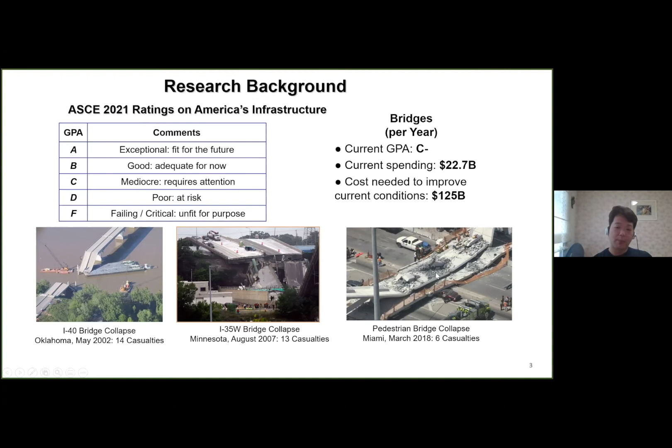According to the ASCE 2021 report, our infrastructure, especially bridges, has a GPA of C-. If we want to improve this current status, we need $125 billion, but current spending is only $22.7 billion. No matter how technology develops or improves, we still have the same issues like bridge collapse.

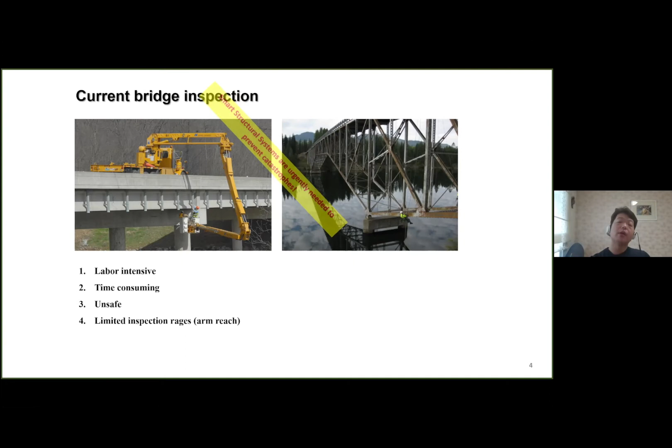FHWA requires inspection every 2 years, but it still has limitations. It's labor-intensive and time-consuming, and unsafe. Also, it has limited inspection ranges, arm reach is limited. Another issue is that if the inspector cannot find the damage at a certain inspection, that damage growth will not be detected until the next inspection cycle. That's a significant issue, which is why we urgently need smart structural systems to prevent these catastrophes.

This is the basic idea for structural health monitoring approaches. Take a brace structure - if we insert an accelerometer, based on the vibration or environmental load, we can get a response. In the same structure under the same condition, if the structure has damage, this vibration pattern changes. Generally, the time period becomes longer, or the frequency decreases. We investigate these two patterns, compare them, and then back-estimate where the structure has damage and how severe it is. That's the basic idea for the structural health monitoring approach.

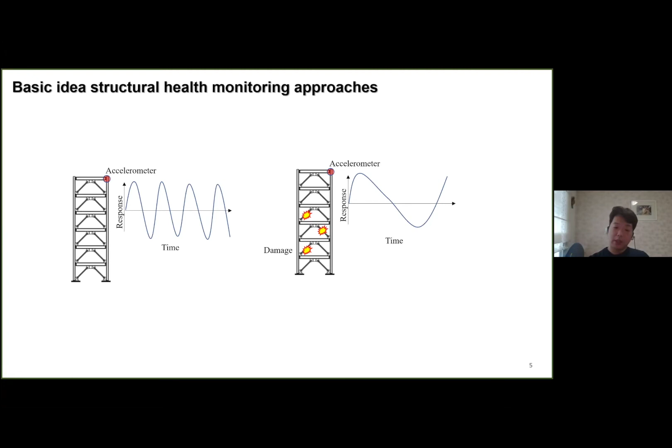This is actually the pattern, like a vibration pattern, a structural response pattern. So I will use supervised machine learning, which is a very good way to distinguish these vibration patterns.

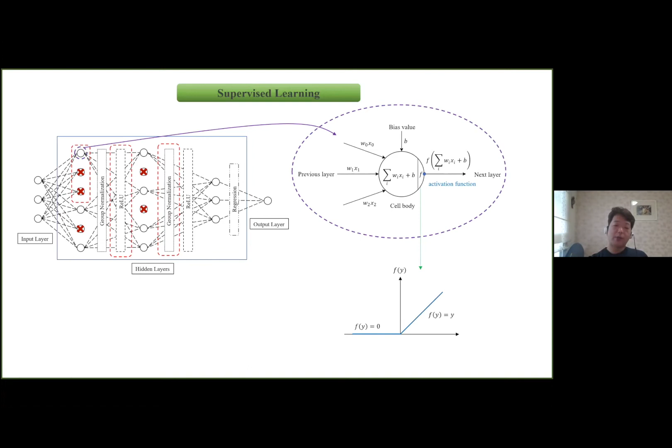But we have another issue. As you know, machine learning requires high quality data, but we cannot make that data easily. It's difficult to obtain data on damaged structures, because we cannot intentionally give damage to the structure, right? We cannot break our bridges.

So this is my idea. I built a model, like an acrylic model. The size is 300 millimeters by 300 millimeters for width and height, and the length is 3 meters. I assume that this is a real bridge. Then I will insert 6 to 8 accelerometers, and then we can measure the vibration.

Then I build another model, a numerical model. We synchronize these two using the model updating technique. Once the model updating technique is well done, if we give the excitation, like the same input data, then the structural response will be the same. Then we assume that these two are synchronized.

In this case, we can give damage, like changing the member size on the numerical model, to emulate or simulate the damage and generate the damage response. To compare if it's really working or not, we compare it with the acrylic model by replacing an element - for example, changing this element to a smaller section element - and assigning the same section on the numerical model, then checking whether the two structural responses match. Once it's matched, then we can generate a structural response for the damage scenario.

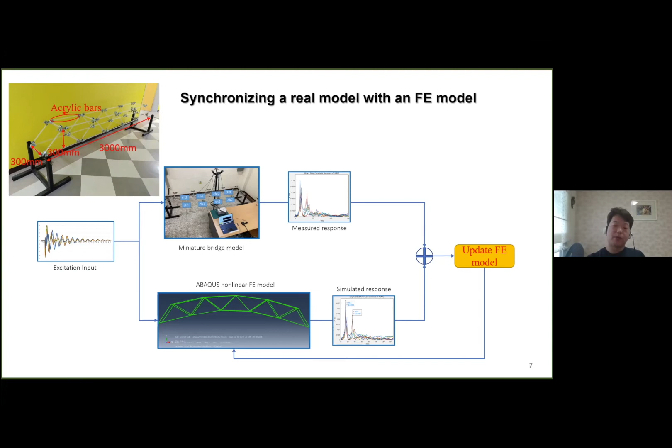For the machine learning training data, I will use a scalegram. A scalegram has two types of data, including time series data and frequency domain data. I believe this image includes more information about the structural response.

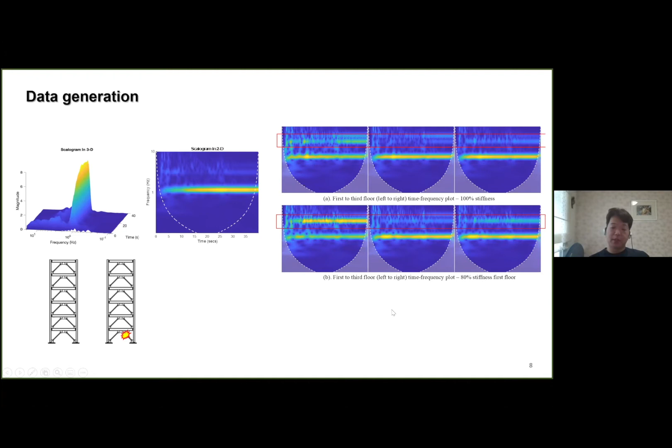But in some complicated cases, these images will be different, but a human cannot detect it. That's why I want to use supervised image processing, like a CNN, convolutional neural network. CNN is a well-known tool for detecting images - you may have heard that some machine learning algorithms can detect a dog and a cat or something like that. So if a human cannot detect this small difference, I believe the machine learning algorithm can detect all the differences, and then based on the back estimation, we can measure the structure's damage location, including its severity.

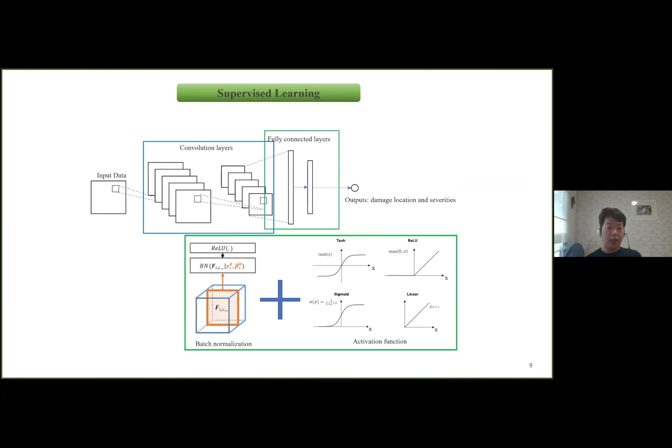This is just a repeat and brief summary of the proposed method. We build a real model - it can be a real structure, or in my research, I built an acrylic model. Then we build an FEM model, a numerical model, and synchronize these two.

Once we confirm the synchronization, or just make a digital twin, we give damage on the numerical model. Based on the damage scenario, the numerical model generates a lot of data, like a structural response.

Based on this structural response data, the machine learning algorithm is trained. Once we optimize the machine learning algorithm, we give real damages under the acrylic structure. This generates another structural response. Then we check whether this machine learning algorithm can detect the structure damages and their severities. This is the main idea of my proposal.

So this is an expected research product and contribution to practice. The proposed methods will continuously monitor structural integrity. That is one strong point. The reason is that current biennial inspection may miss critical and dangerous damage growth until the next inspection cycle.

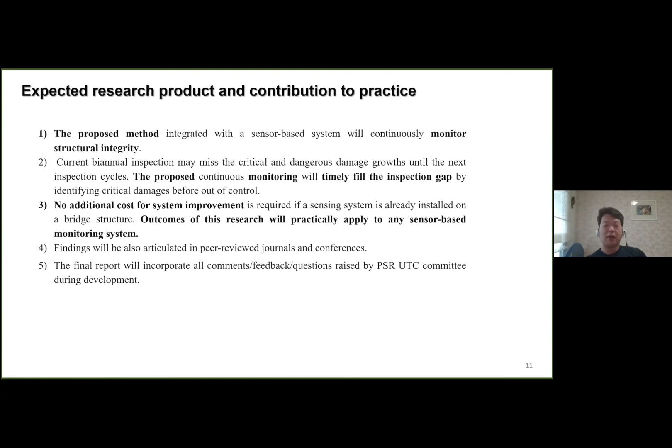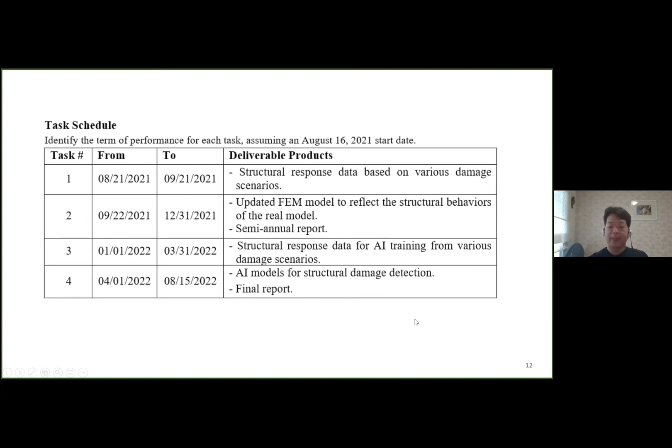So this is the end of my presentation. Do you have any questions?

That was an excellent presentation. One of my questions is, I didn't quite understand, you're going to construct an actual physical model first and then a simulated model. Could you describe the difference between task 1 and task 2?

Task 1, because we cannot break the real bridge, right? So we want to monitor, but we want to get damaged data. So for the experiment we propose building an acrylic model. That's a real model. That's task 1.

And then we also think about the damage scenarios, like it depends on the structure, so some weak point will fail first. So we will find the damage scenario and describe the damage scenarios.

Then we synchronize these 2 models, based on model updating, to make a digital twin. Then we give the damages on the numerical model, because we cannot give damage to the real model. This is for training the algorithm. So the FEM model generates a lot of data, enough data for machine learning training.

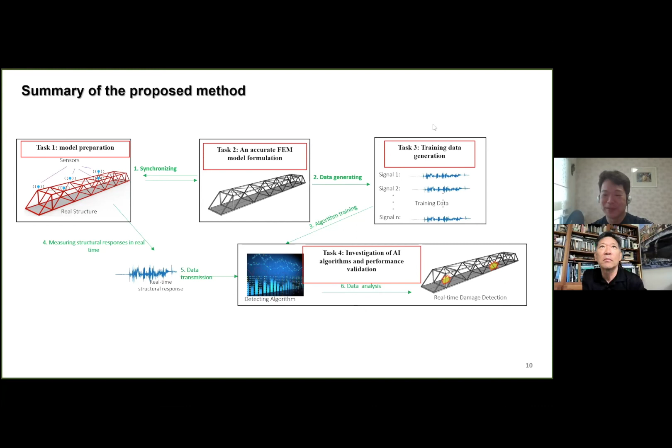Yeah, thank you for your invitation. Yeah. Yeah. Okay. Okay.

All right, so I think it is my turn. Thank you very much for inviting me today, and thank you everybody for joining today's seminar. My name is DoSoo Moon, and today I will present the proposed proposal, which integrates a hazard vulnerability assessment and mitigation framework with mixed reality for transportation infrastructures. So the keywords from the title are vulnerability assessment, mitigation framework, and mixed reality.

All right, so before getting started, let me introduce myself a little bit. My name is DoSoo Moon, and I got my bachelor's and master's degrees from Seoul National University, and then my PhD from UIUC. After that, I did some postdoc research at UIUC at different facilities, including the Smart Structure Technology Laboratory, Mid-American Earthquake Center, and Network for Earthquake Engineering Simulations.

And then I joined the Department of Civil and Environmental Engineering at the University of Hawaii in 2018, and I'm working as an assistant professor. My research interests include resilience and sustainable infrastructure under extreme events, structural health monitoring using smart sensing, and earthquake engineering.

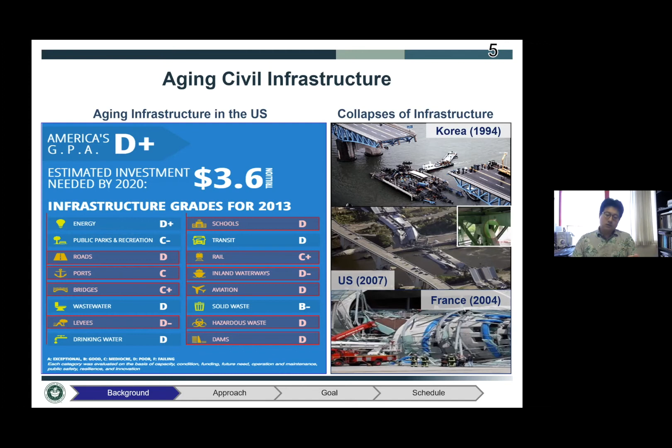So what can we do? We can do the hazard risk assessment. By doing this, we can quantify the risk, and then we can see what are the consequences when the event happens, and what is the best way to mitigate those events.

For this, we need the following three components. The first component is the hazard information, so we have to know what kinds of hazard we are dealing with. For example, earthquake hazard map, tsunami hazard map, or sea level rise map.

The second component is we need the inventory data, so what kinds of infrastructure is available at that region. We can get how many buildings there are, how many bridges, how many power plants. With these two informations, and the last component is the vulnerability information.

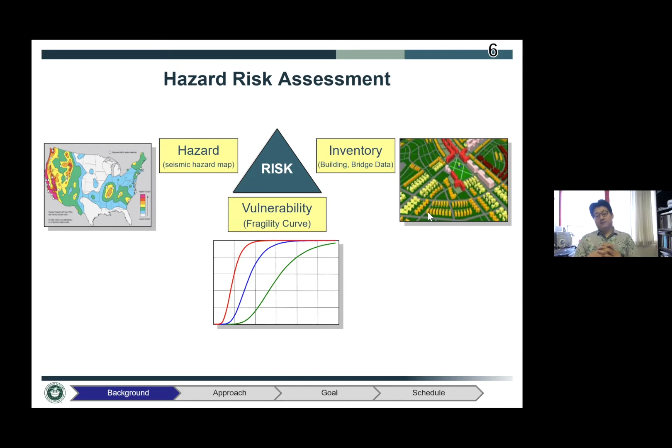This shows what your structural performance is under the given hazards. This curve we call the vulnerability or fragility curve—it shows how well your structure will perform under the given hazards. Among the three components, the most important one is the vulnerability curve, because hazard and inventory are somewhat given. So what we can do is improve these vulnerability components when we do the hazard risk assessment.

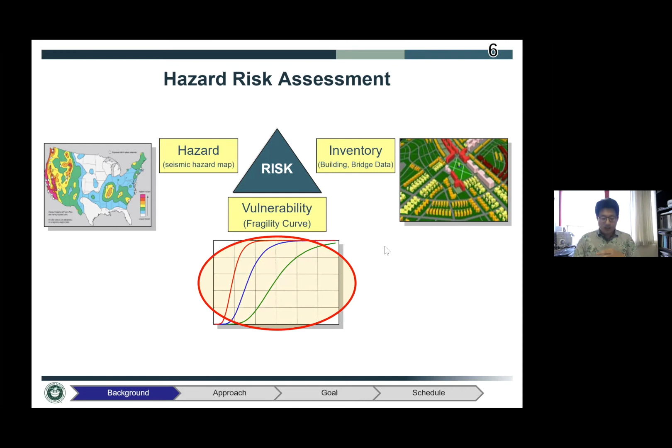Then how can we derive this curve? But before that, let's talk about what the fragility curve is a little bit. The fragility curve is a probabilistic indicator of the structural safety against hazard.

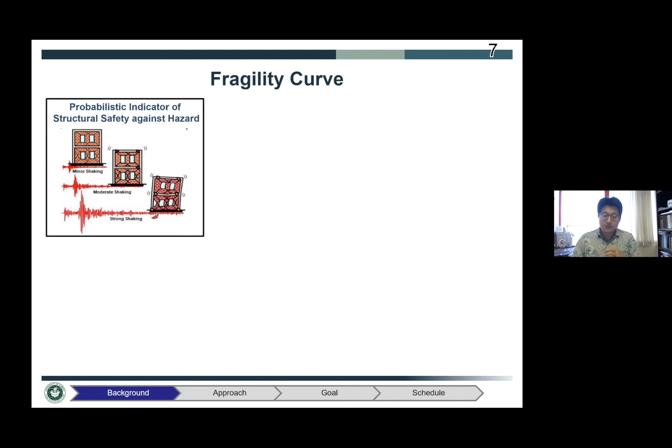Using this fragility curve is straightforward. You just find the expected level of hazard, use the curve, and read the failure probability. Once you get that number, multiply it by the number of inventories in that region, and then you can estimate how many buildings fail, what the economic losses are, and so forth.

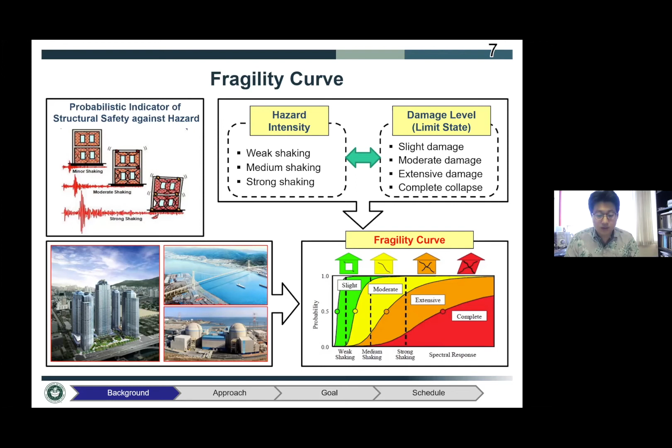This fragility curve depends on your structure. So depending on whether your structure of interest is buildings, bridges, or power plants, all these fragility curves will be different. Then how can we derive this curve?

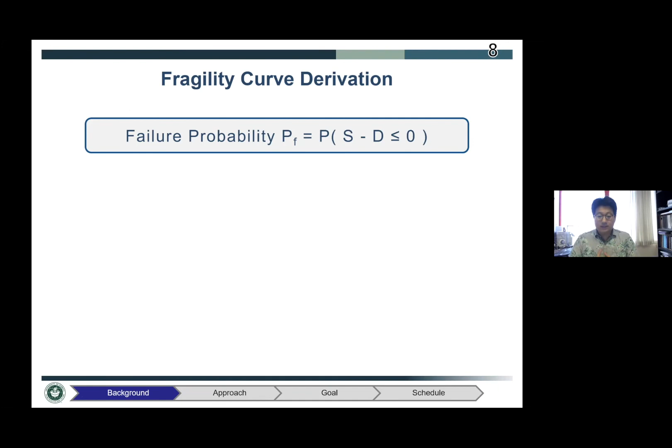I have to talk a little bit about the mathematical background. Failure is defined by the following equation—it basically calculates the probability when your supply, S, is less than the demand, D. So when your structure cannot handle the hazard, like a load or demand, we call that a failure.

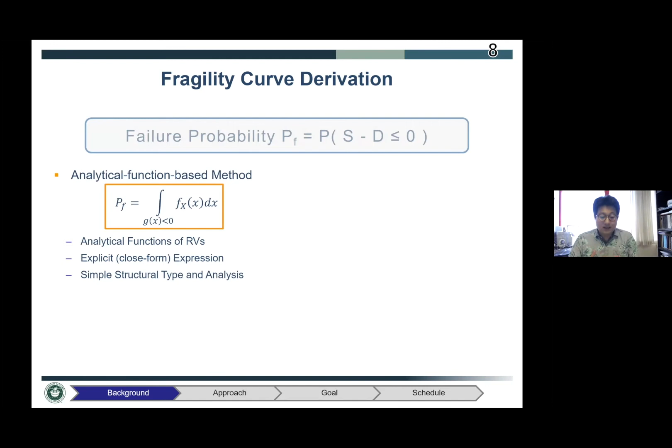There are two existing methods. The first is the analytical function-based method. This defines your S and D terms as random variables, derives mathematical expressions, and solves the probability equation mathematically. It is really complicated and requires a lot of math skills, and it can only be applied to very simple structure types.

So most of the time, we use the second approach, which is a simulation-based method. Maybe you've heard of this method—one representative method is Monte Carlo simulation. Basically, you just run the analysis and count how many failed cases occur out of the total trials.

This is a very easy method, but it has some problems. One problem is the expensive computational cost. For example, if your failure probability is 1%, that means you expect 1 out of 100 cases to fail. But what if your failure probability is less than that, say 0.01%? Then you need at least 10,000 simulations to get at least one failed case. So depending on your target failure probability, it suffers from computational cost.

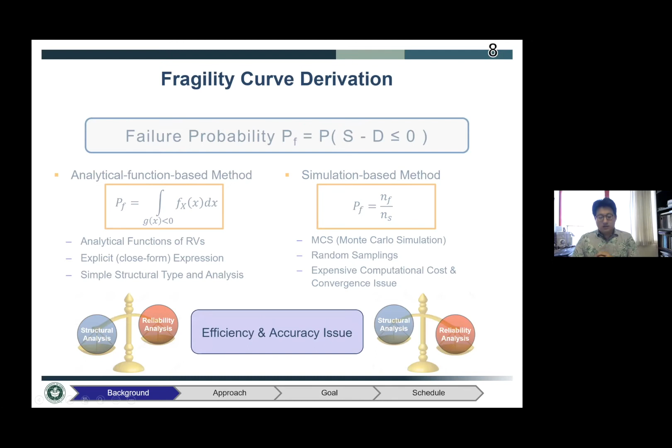Because of these issues, this project proposes another approach. Here, instead of evaluating S and D at the same time, it evaluates supply and demand separately.

What it can do is estimate the response, the demand, using the Monte Carlo simulation approach. But when you calculate the failure probability, it uses a math skill, so it can get a more accurate failure probability. For this technique, we will use FORM, which I'll explain a bit more in the following slide.

For this, we have to couple the structural analysis and reliability analysis software. By doing that, you can get more accurate and more efficient results—that's the keyword. So you can get the fragility curve very quickly, and because it has less computational cost, you can use a more detailed analytical model, so your estimation will be more accurate or more realistic.

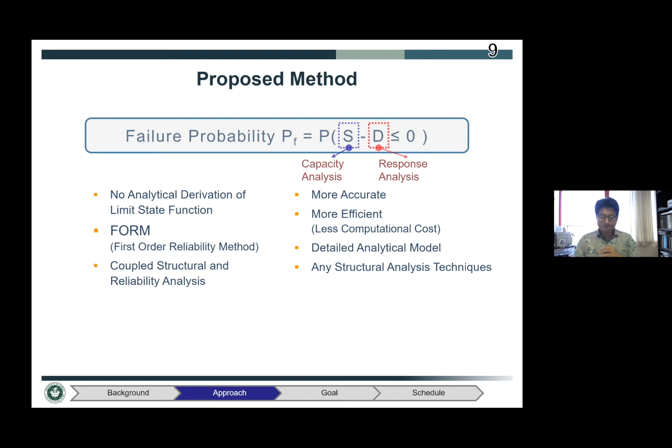Okay, so this is a proposed structural reliability analysis platform. First, we identify the uncertainty in your materials, structures, or load. Then using that information, we can do the structural analysis and reliability analysis.

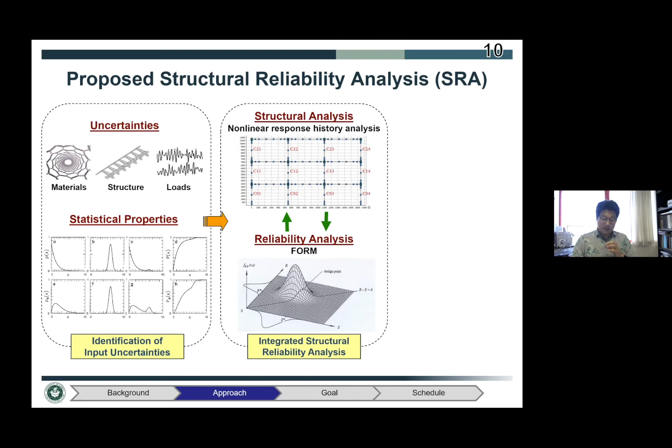But unlike previous approaches, these two different software can talk to each other and exchange data, so they can calculate the failure probability mathematically. Using this, you can calculate the fragility curve.

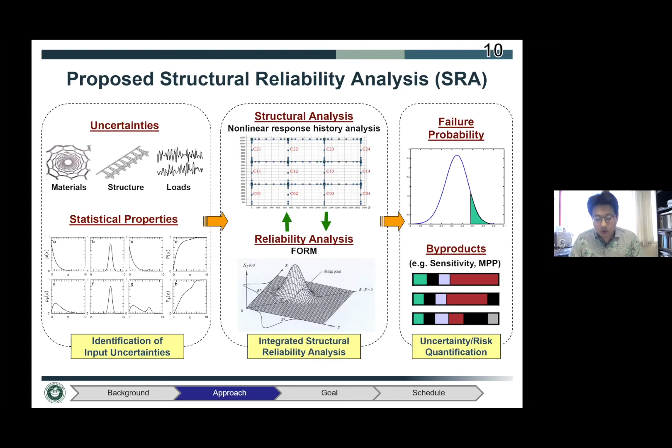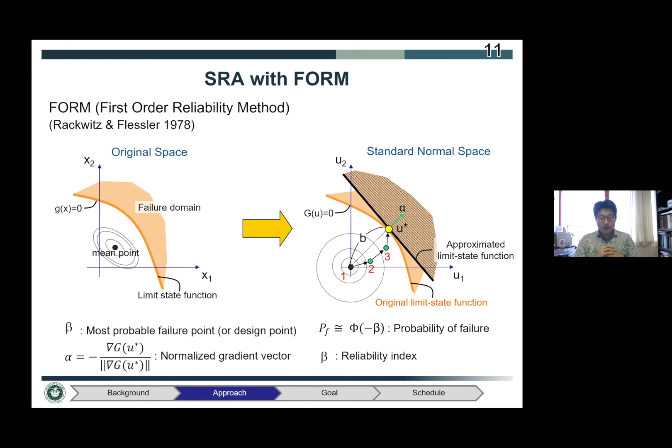What we do is transform to the standard normal space, and then approximate the failure domain with a linear line. Then we can easily estimate the most probable point, and using that information, estimate the failure probability.

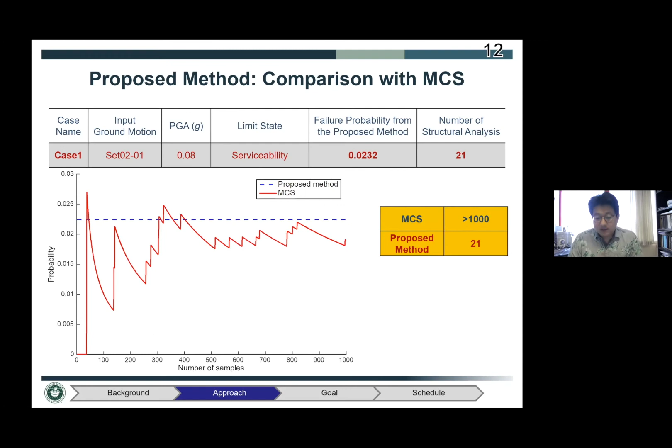Using this technique, when you compare the proposed method with Monte Carlo simulation, you can see it is very efficient and accurate. Our target failure probability is 2%. The red is Monte Carlo simulation, and the blue is the proposed method. The x-axis is number of simulations, and the y-axis is failure probability.

Our proposed method gets the target failure probability within 21 simulations. But Monte Carlo simulation, even with more than 1,000 simulations, still doesn't converge, requiring a lot of analysis.

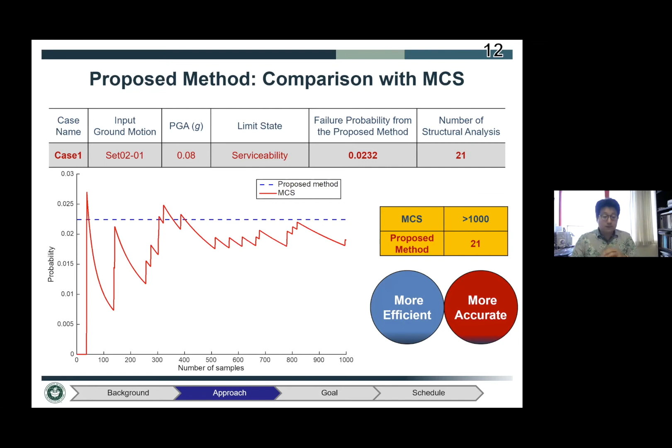When comparing our approach with Monte Carlo simulation - using Monte Carlo with a supercomputer and only 2D models, it still takes 456 hours. But with the proposed method, using my personal computer and a 3D model, each simulation takes more time, but I can still get the whole curve within 36 hours, within 2 days. So this method is very efficient.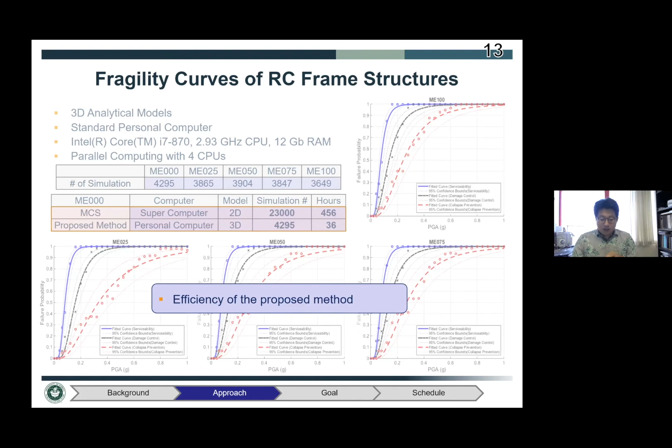Using this framework, let's say we have workers who go to the bridge site and inspect damages. When damage is found, they report where the damage is. This damage information can update our numerical model, and show the change in the fragility curve. As you can see, if damage happens, your failure probability can be changed, so your curve can shift.

Using this integrated framework, your damage information can be easily integrated, and a more up-to-date fragility curve can be obtained. Another thing I want to touch on from this project is that since practitioners will inspect the bridges, just reading this plot is not easy.

So what I want to do is use virtual reality - a Microsoft HoloLens that can visualize a 3D plot of the bridges, indicating where the damage is.

If we select a damage point, it will show the change in the fragility curve, and also a table showing the expected consequences - what is the level of economic losses when a certain event happens. So it will be very useful.

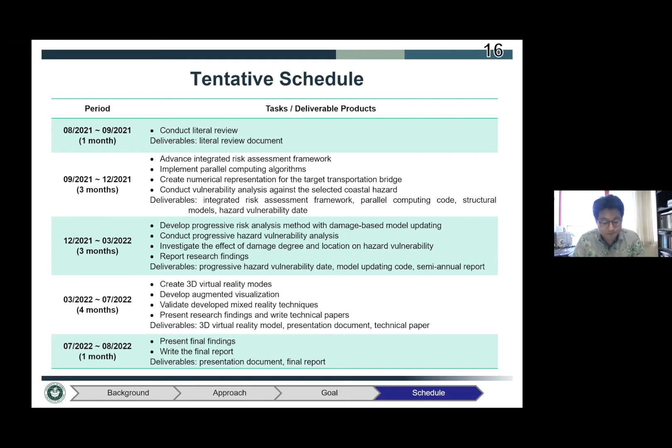Okay, so that's what I prepared today. That's it, and thank you very much. If you have any questions, please ask me.

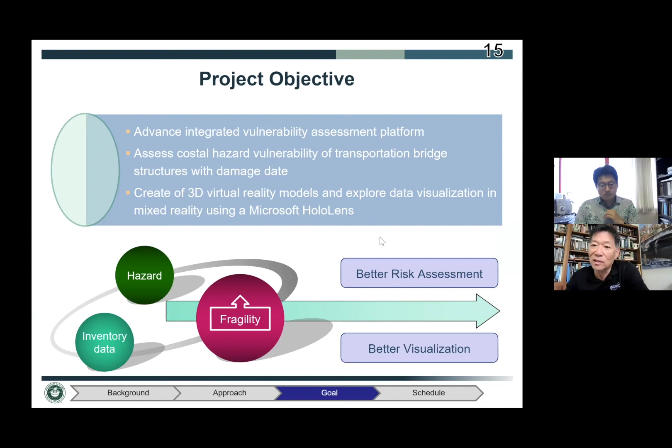Thank you for your presentation, I really liked your clear explanation and the background on the research. It strikes me that there are going to be some types of structures and some types of damage that might be more readily detected than others. I'm wondering if you can talk about the types of damage that can be detected and then simulated with this approach. In the built environment there are more uniform surfaces. What about places where there's more spatial variation, that might be more challenging? I'm just curious about the types of damage you're going to focus on.

So basically I will focus on the structural damage, which can affect structural performance. When practitioners inspect the bridges, they report the damage locations, crack size, and all the details. I can implement all that damage information into the model, and it can show what the consequences are from the damages. So it can include all kinds of damages.

Let me open it up. Are there other questions or comments about either the presentation, the methods, or the applications from this? Any questions or comments?

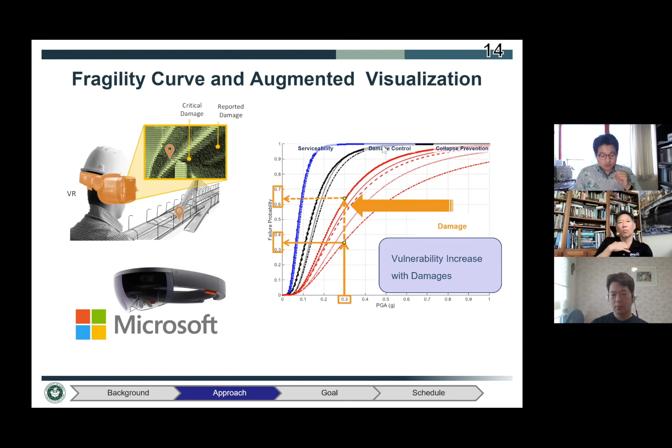It is a very helpful presentation, thank you to both presenters. We are also doing some machine learning work, and data has always been the challenge, especially doing more innovative work. So I was wondering how the data part is being dealt with in your models compared to other conventional approaches. Amount of data, accessing data, formatting data, and all that.

Do you ask me or Dr. Moon? Yeah, Dr. Cho and Moon, if possible.

Okay, so current machine learning approaches for structural health monitoring, because we cannot get enough data, the machine learning only detects failure or okay, because we cannot get the collapsed data. So the machine learning algorithm just says this vibration pattern is okay, so the structure would be fine. But once they detect some sudden data types or patterns, the machine learning algorithm says, oh, the structure has some problem, but they don't know what problem, what the severity is. So they cannot find out the damage locations and damage severities. But my approach generates data like a damage scenario using the FEM, then the machine learning algorithm can train on the damaged case. That's why my approach can detect the damage location, including the damage severities. That's a big difference. Okay.